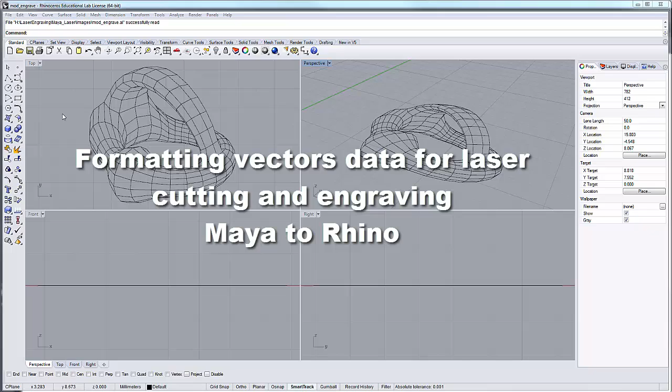Okay, I've loaded the Illustrator file that we created in Maya with our vector render into Rhino, and this is what I get. I get a flat, basically a flat 2D illustration, sort of like analogous to a Make 2D illustration. Now let's look at this more closely.

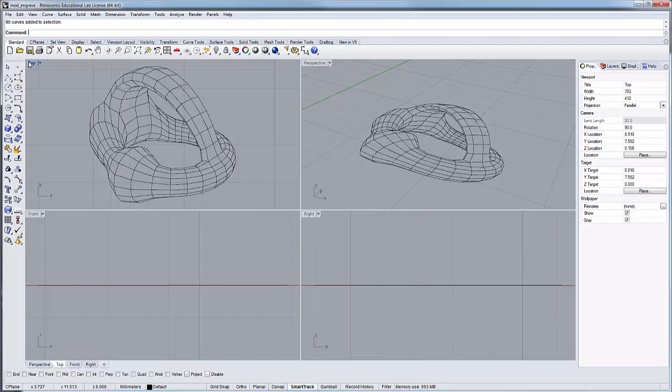I'm going to expand the top window so that we can look at it more closely. And I'm going to come over here to my layers because truly we got vector curves here. But one of the nice things, remember with that solid fill that we use, we can extract some really valuable information from it.

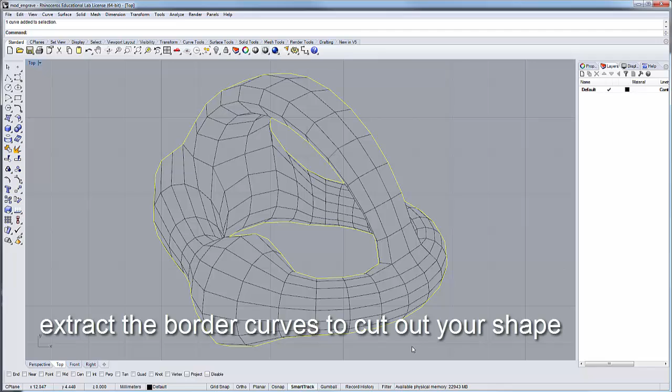So we can click on the outline, and we have this curve that basically describes the border. I'm going to hold down the Shift key. There's another curve that describes the interior there, and there's another curve that describes that interior there. So basically we have silhouettes.

So I could create a new layer and change the object layer here, and I would probably paint those blue because they would probably be an inner cut, and change the object layer once again just to make sure. Those lines are now blue.

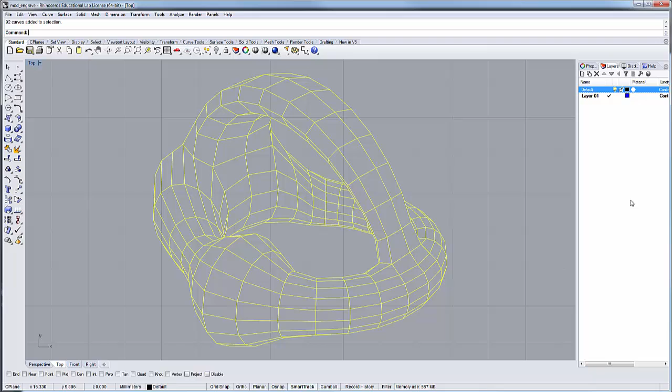They're my inner cut lines. I could select these objects, and I could probably change this layer to red and retitle it Engrave.

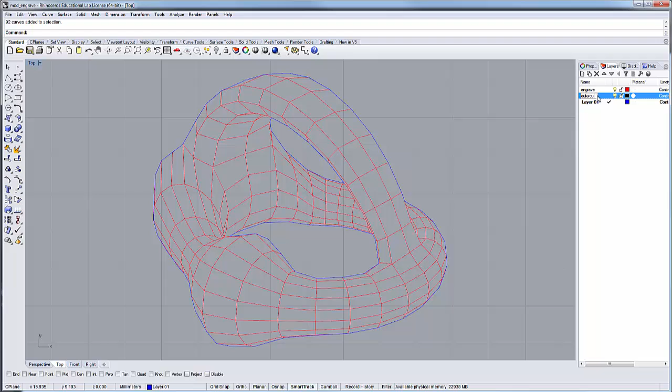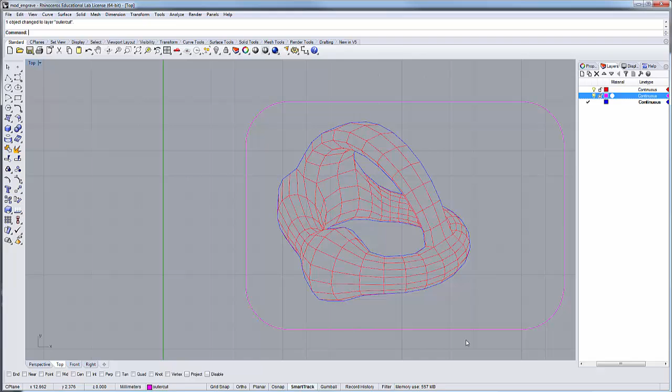I could then create a new layer, and I could call that layer Outer Cut, paint it magenta, and draw a box. I'm going to use a rounded corner around my object, like so. And I'm going to take this, I'm going to put this on that magenta layer. And there we have it.

We have a composition that is ready for engraving, cutting, and inlay using our laser cutter, and that's using a Maya workflow, and that works pretty nicely. And I like the fact that you can use your color fill basically to produce your mask. That's a really nice touch.

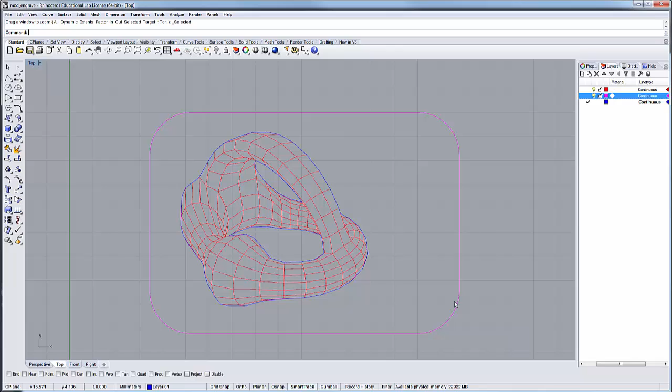This describes sort of like the Maya to Rhino workflow illustrator, but this is a good combination working with Maya and Rhino to format files for laser engraving. Thank you.